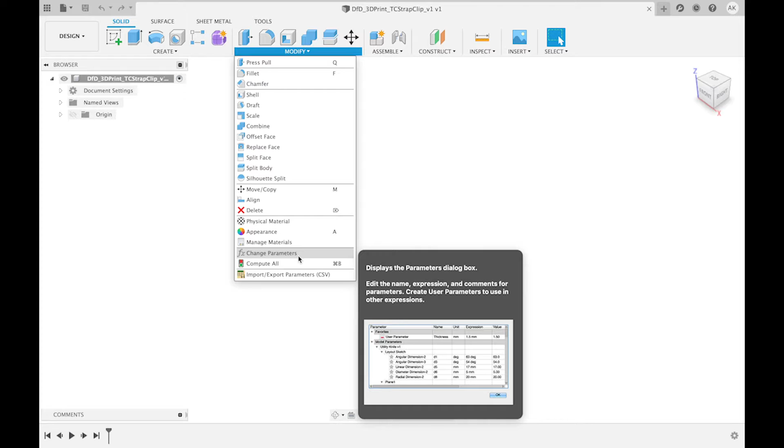As you can see, I'm modeling the design parametrically, or in other words, using parameters, so that the design is more flexible and can be adapted by whoever downloads the design.

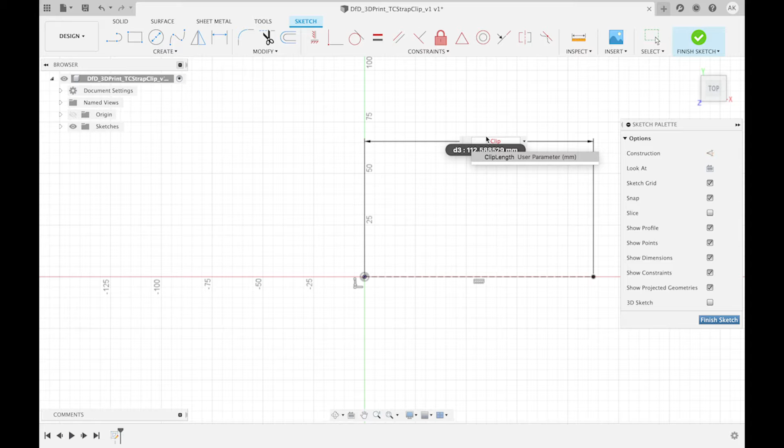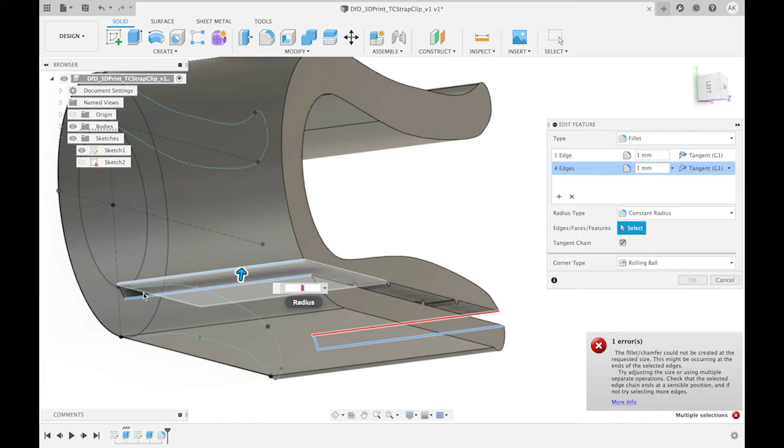3D printing allows you to produce complex curved geometry. I need to make sure at this point that the wall thickness is not too thin for 3D printing. Adding fillets and rounds helps to reduce point stress at the corners and edges. This is also useful for 3D printing because it can help avoid thin layers and single strands of material.

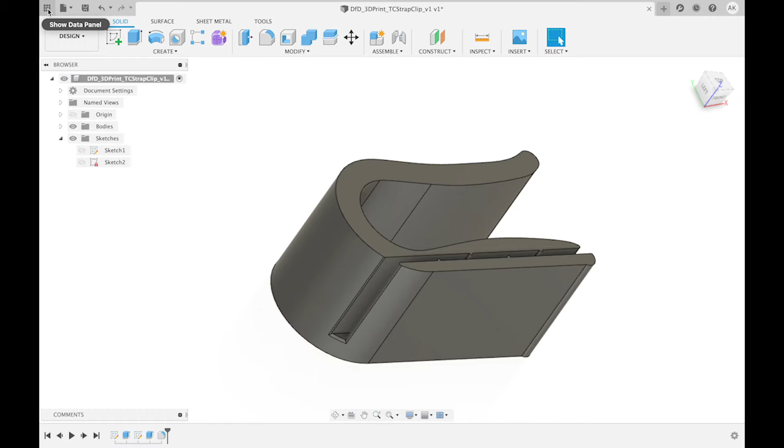Here you can see the design is prismatic, meaning it has a continuous cross-section. However, there is a slot available for the strap to pass through. This part will need to be oriented so that the opening of the slot faces upwards and not downwards, so as to avoid support material. This design is simple enough for 3D printing; it has no overhangs, requires no support material, and the wall thicknesses should be sufficient for the job.

Now we've modeled our design, it's time to set it up ready for 3D print. Here we have the Prusa i3, a very reliable, very popular brand of 3D printer, but any kind of FDM printer will work for this kind of print. To set this file up, we're going to be using Prusa's own slicing software called Prusa Slicer, but any kind of slicing program will work. Just make sure that all of the printer settings, like the nozzle diameter, are correct in your slicer program.

You can download the slicer software for Mac, Linux, or PC from Prusa's website. Once the part had been sliced, it was time to load it up on an SD card and put it on to print.

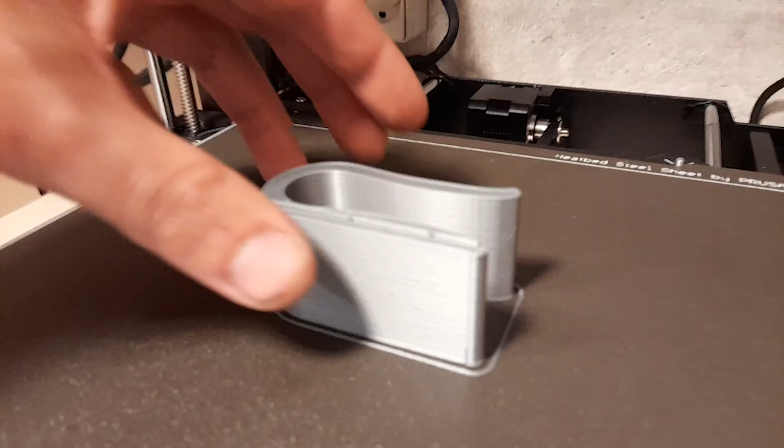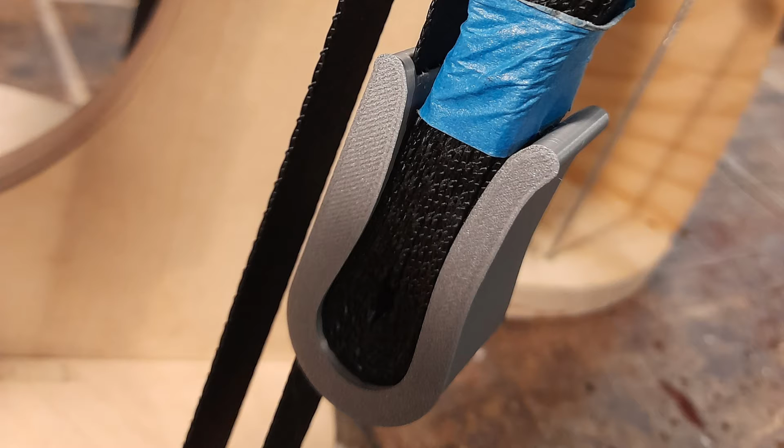Now that the part has been designed, printed, and tested, it's time to share the STL file on the Wikifactory project, so that others can print it for themselves. I will also upload the Fusion 360 file, so that the parameters can be changed to fit whichever kind of strap the user might have.

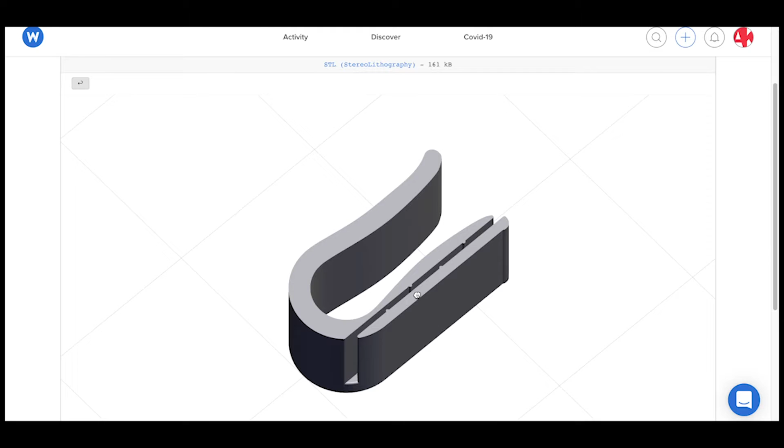If they download the STL, the model will be ready for print, as I've just tested, but they will need to slice it for their own printer and printer settings. If they choose to edit the Fusion file, they'll in all likelihood need to export the file as an STL or an OBJ in order to import into the slicer.

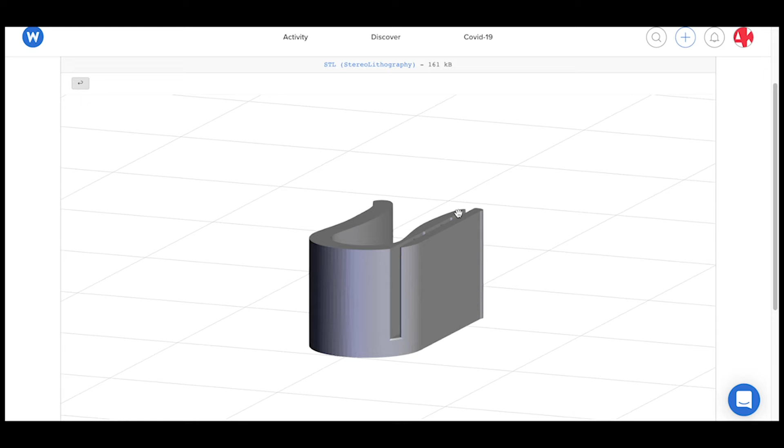These technical steps, although routine for any veteran 3D printing technician, could be a communication and user experience challenge for the designer if the user is totally unfamiliar with 3D printing. That is why I will need to continuously update my documentation and assembly guide for the project.

So what are the key takeaways? The design of the clip made use of the capacity of the printer to produce complex curvatures, but I was careful to ensure the orientation was such that it did not require support material and the wall thickness was not too thin. I tested the print myself on an FDM printer to ensure it was possible to be printed.

I then shared the STL file and parametric model on the project page so that the design was accessible and adaptable. Lastly, I will need to continuously update the documentation and assembly guides for transparency and communication.